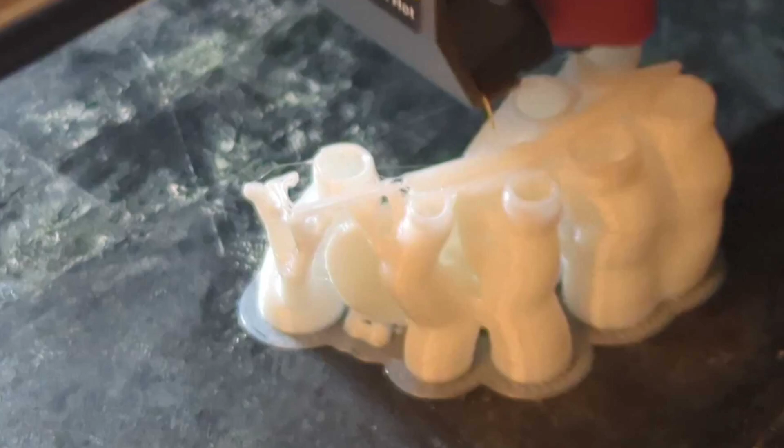So I'm printing this live right now. It's broadcasting live on my channel, this print. I'm watching my own live feed for a second here just to show you that it's printing in action.

So what I'm printing is, I have these hair clippers, and I'm missing the number 1, which was kind of my go-to one. I don't know how I lost it. And a tooth broke off the half, so I decided to go into Solidworks and create my own.

I've already created it, and I recorded it, and I'm just going to speed through the recording and narrate it at super high speed, because it ended up taking me like 2 hours all said and done, measuring and everything. I said nobody's going to watch it for a couple hours, so I'll have it playing at like 70 times speed here, and here's what's going on.

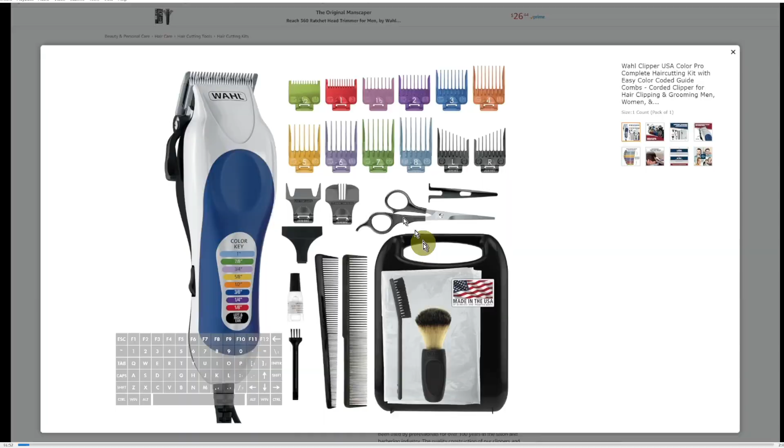Basically I'm going to make a parametric model so I can make any of these sizes. So I started with the number 3, and if I create the number 3, I can then adjust it to size for the regular ones.

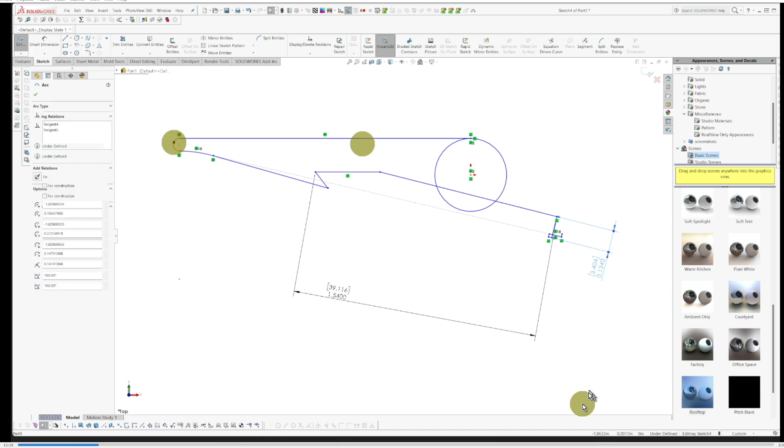This is kind of tricky geometry to measure with these clippers. It's very three-dimensional, not just 2.5D as they say. It wasn't super complicated, but a little tricky, not all 90-degree angles, and not always easy to measure various things.

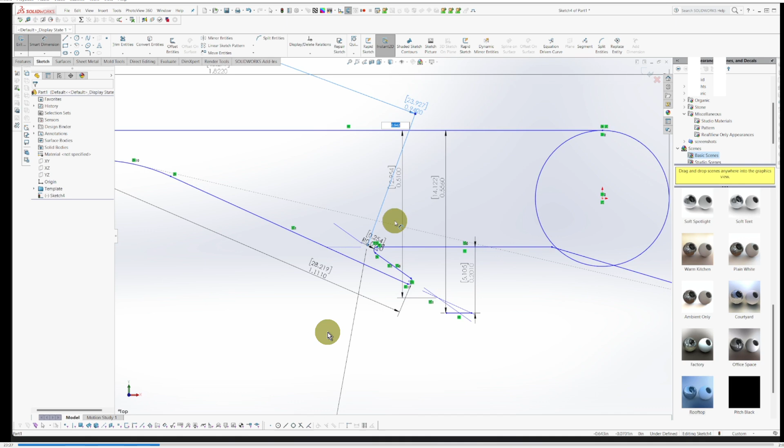So you can see here, I'm measuring and breaking things, but I'm just going from measuring what I can and trying to get the layout as good as I can.

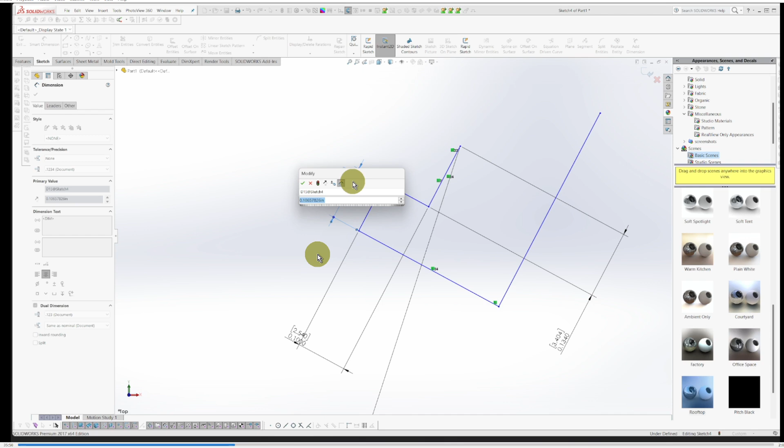Basically my technique here is to make one master sketch of the basic shape, and later I will project the geometries onto later sketches to create individual features.

So as you can see, I'm working through this, trying to get it all fully defined, or at least mostly fully defined. There end up being a couple arcs that aren't quite fully defined, but that's fine. So that was my main sketch.

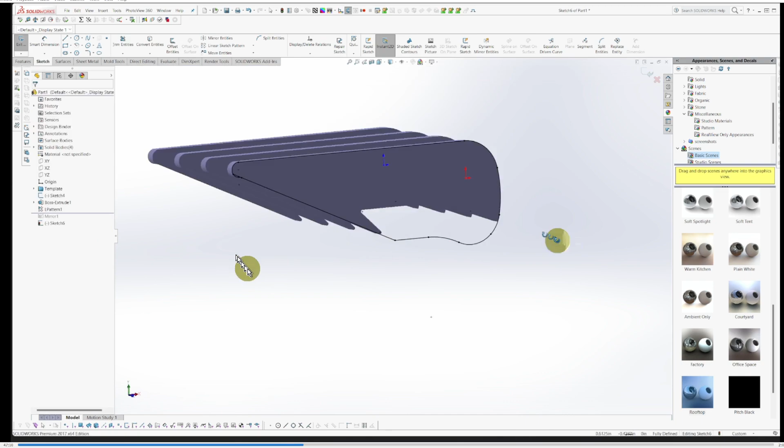Now you can see I started a new sketch based on geometry from that sketch, and I'm projecting geometry, so it goes pretty quick after that. There we go, looking good. It's almost going a little too fast.

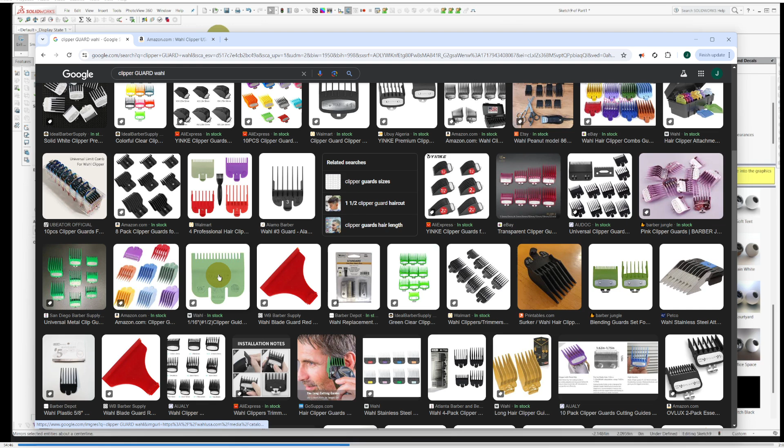This part had to do some thinking here, really trying to mimic the shape of it. Let me go back to the website so you can see. You can kind of see here, it's got these grooves, these slots here, and that allows this to flex relative to these two. You can see it a little bit. There it goes.

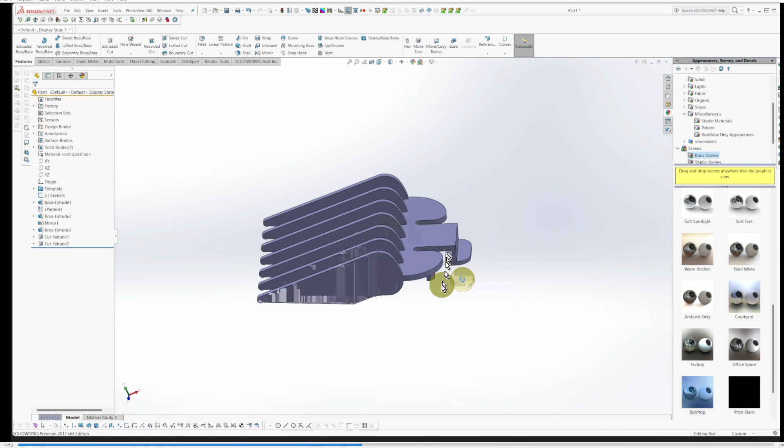So cutting those grooves and getting rid of that. I don't know if you see what, I want to go back a little bit. Trying to go back here to go to here, just to show what I was doing here. So making that flexure piece.

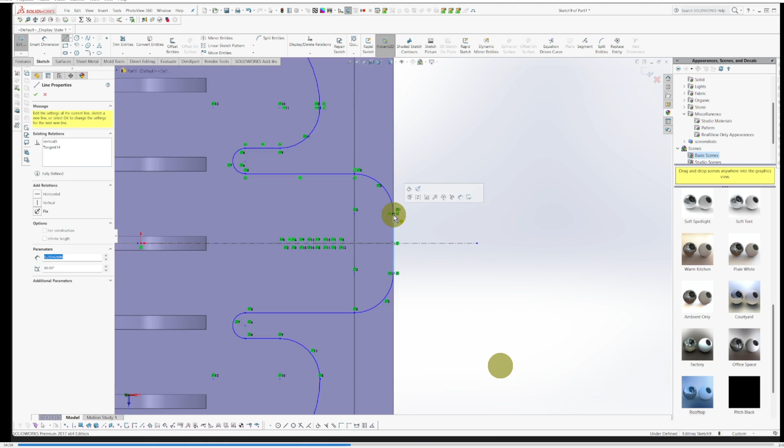You can see this flexes and that snaps over the guard. I started to do it one way, then realized a quicker way to do it, so I got rid of that one, and now I can just change this sketch. The distance between these lines basically tells me how thick that's going to be.

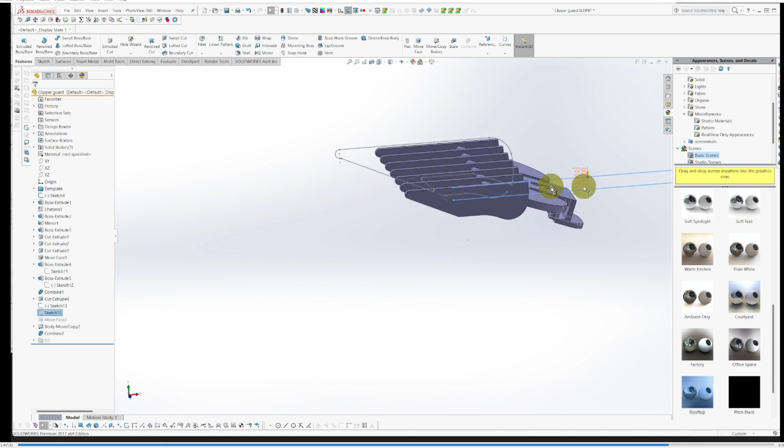Now for this size, which is actually the 0.5, I didn't change the 3 yet, it's actually a little different. So this is showing the 0.1, showing the number 1, and that's probably the number 2. I had to add these little reinforcements on the sides so the sides don't flare out on accident. That was little changes specifically to the number 1.

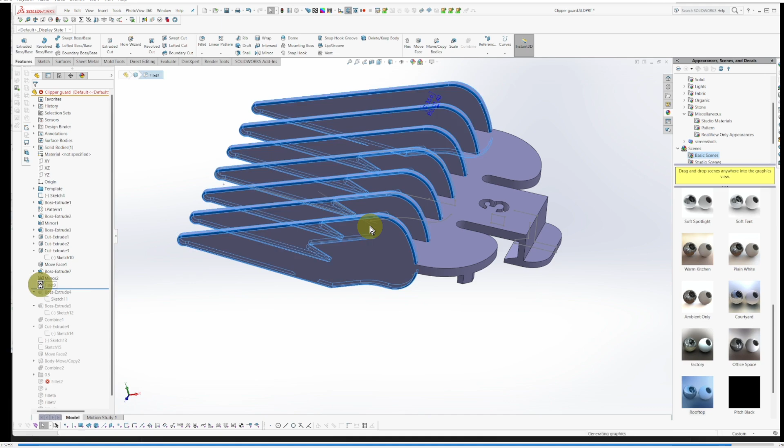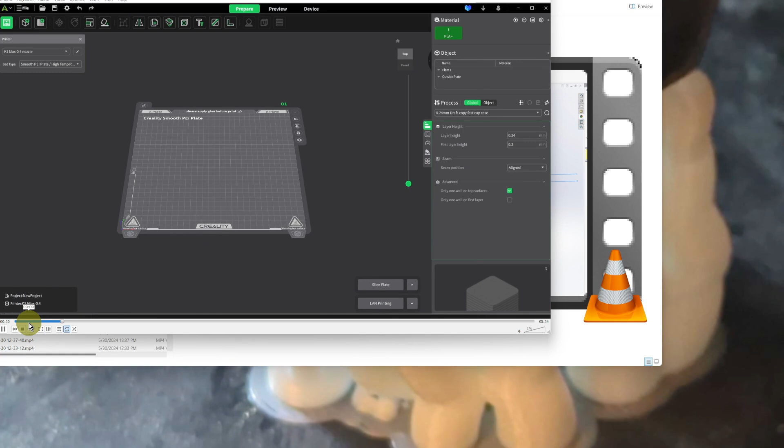It's quite a bit, significantly different than the older version I've been using for like a year now. Hadn't tried to update it, and I see there are significant changes now. It seems kind of nice, and I wonder, like, people use Orca Slicer. I was just looking at that this morning, but I wonder if this catches up to Orca Slicer now.

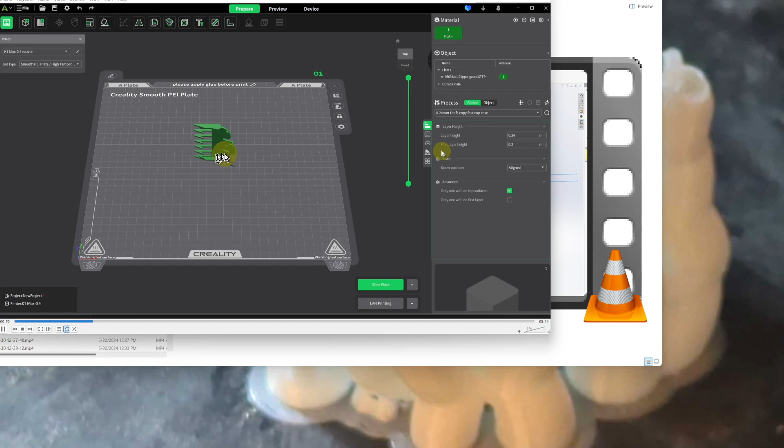I don't know, anyway, so you can see my final number 1 print here. I was debating which way to print it, and I decided to print it flat side down, and then use supports. I decided to use tree supports, figuring that will make a nicer print.

And let's go back to my print. Looks like it's printing successfully. Love this printer. This is the K1 Max, if I didn't make that clear.

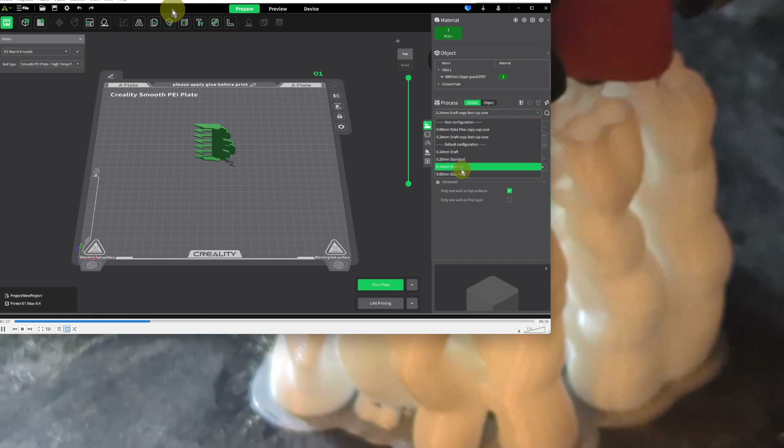Back to my video. I guess I was going pretty slow in here. Oh, you know why? Because I didn't speed this up. I sped up the other one. Yeah, I was going regular speed on this video.

So that is with tree supports, and I just did the 0.24 millimeter draft because I figure that's about 5 layers per tine, which should be plenty. And so it should take about a half hour to print.

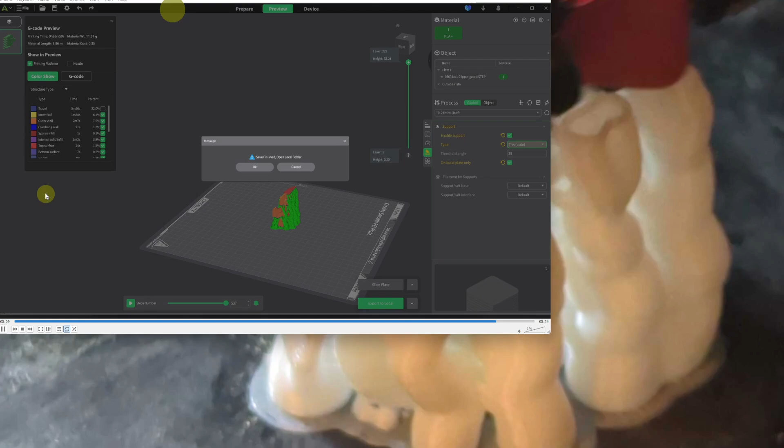And I'm broadcasting the print live, like I said. Now, unfortunately, I've accidentally had it on private for the first 8 minutes, and this is only a half hour print, but no harm done.

This hyper white looks really cool. I don't know, maybe it's more transparent than other whites that I've used. Because a lot of times with white stuff, on the video it just looks all white.

Might help that it's a pretty good camera. It's a Pixel 7 Pro phone, so that might be helping. But I think that white is just very translucent, and so it allows a lot of light to come through, and so you can really see the geometry.

And I guess, you know, if it was just flat geometry of the guard, then it wouldn't be as cool, it wouldn't be as much contrast. But with these tree supports, that really makes it interesting looking, I guess.

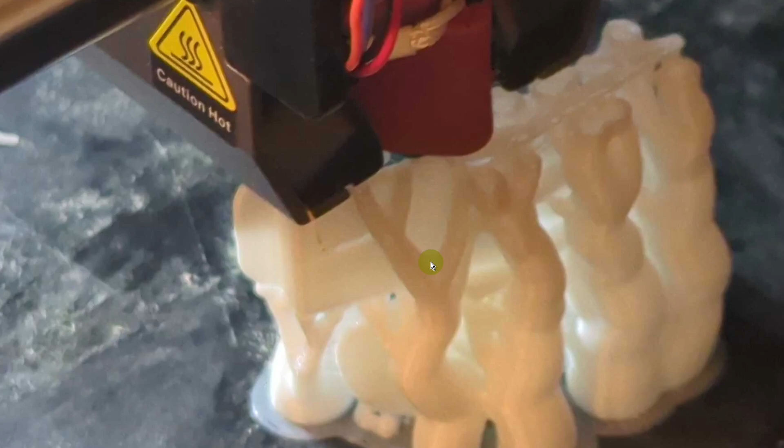One more reason to use tree supports. They just work really well too, though. I wouldn't say I use them everywhere. A lot of times, probably more often, I do use standard supports. But whenever I use the tree supports, I'm very impressed with how well they work.

Looking to see, I mean, we're more than halfway done because I'm at the top edge of the rear snap clip latch. So basically, that's halfway up the print. So we are getting there. It's probably 10 more minutes.

Is there anything else that I wanted to show? I can just go back into my CAD model here, and we'll see if there's anything else to discuss on it.

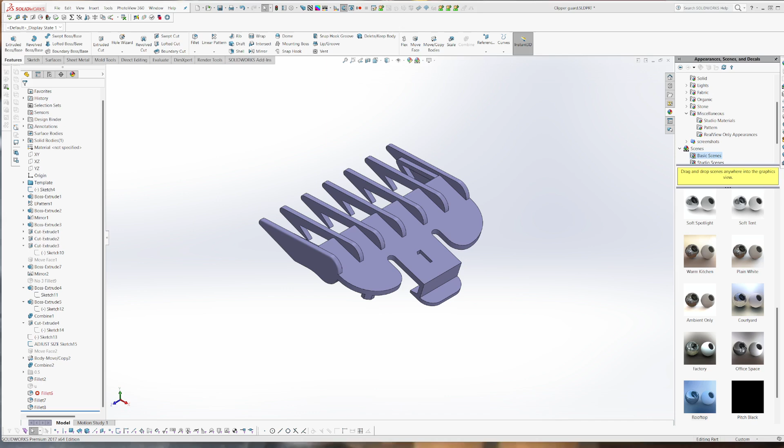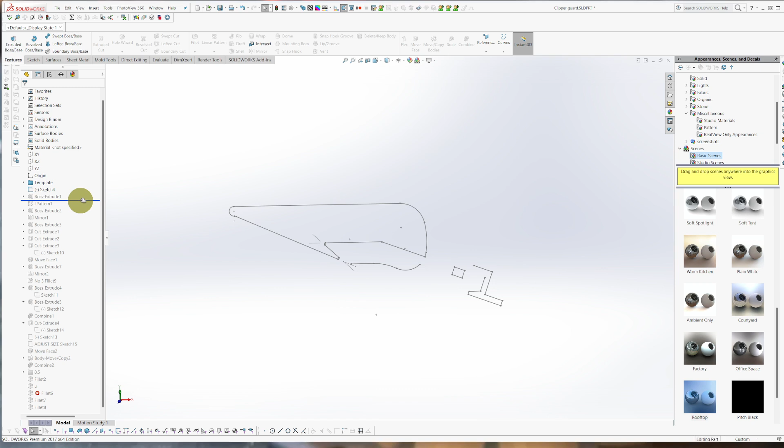So yeah, this is the number 1. And so I guess what I didn't make clear there, let's just do this, let's roll right through it real quick. So first I made this sketch, that's my main driving sketch, and this is based on the number 3, which is 3/8, or what they call it, 10 millimeter, which is pretty close. It's off by like half a millimeter or whatever, just enough to get the basic geometry.

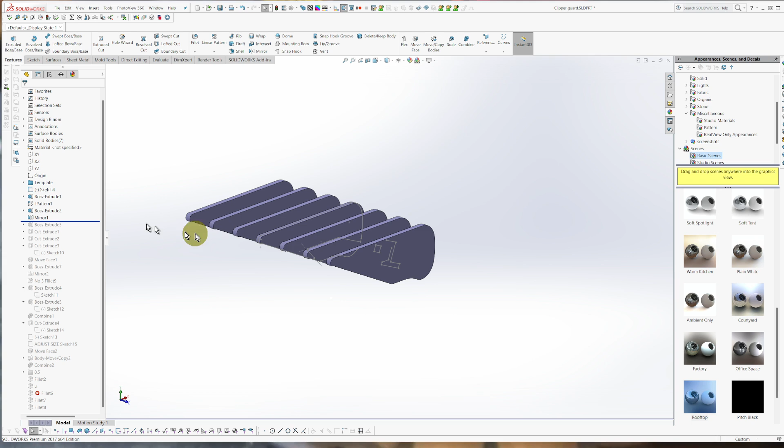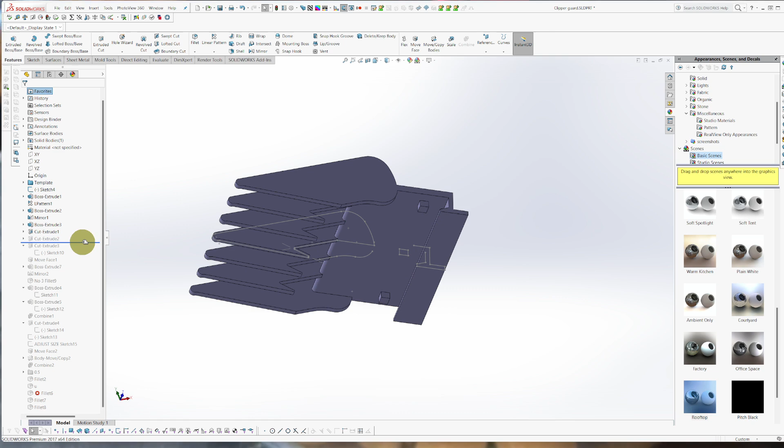And then I patterned that, and then I modified this outside face because the outside face retains it side to side, the outside 2 faces. And so then I mirrored all that, and then I extruded the snap the full length, and then the nubs the full length, and then I think I cut away the nubs here. Yep, and those just rest on the metal clipper, platen, or whatever it's called. And then here I cut that out, so now you're really starting to see that's basically the whole geometry done.

Then I had the number cut out. I don't know if you know how to, it's pretty easy to do in Solidworks sketches. I tell you what though, Rhino can do all kinds of cool things as far as like bending text around 3D surfaces and things. Like I was looking for my sous vide.

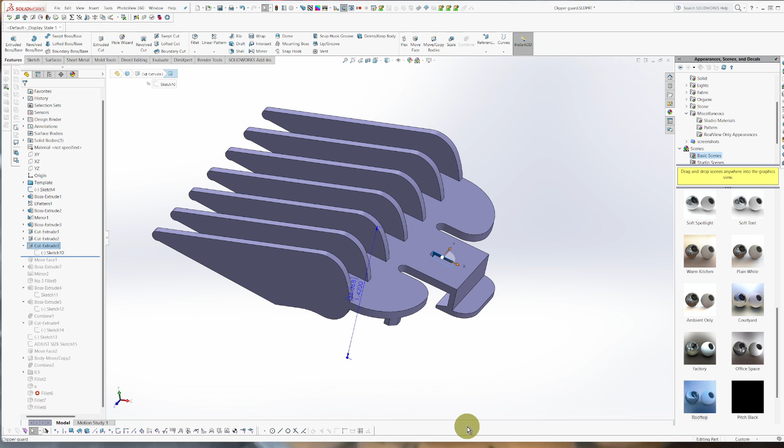Subvid. No, subvid movie.

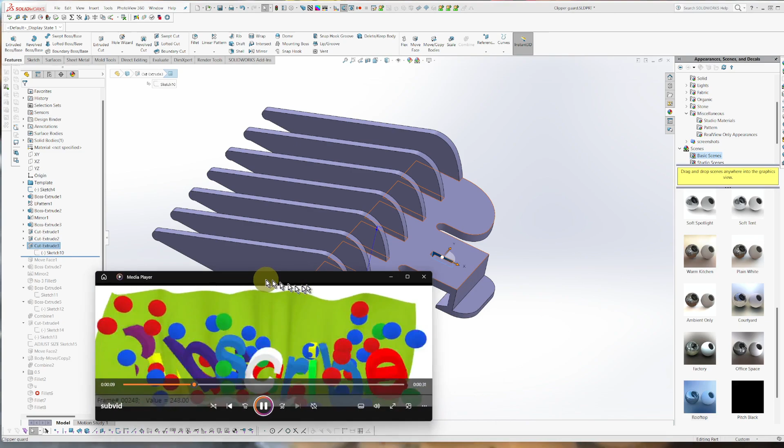So like this thing, I made this in Rhino, and it didn't even really take me that long. And I'm not even an expert at Rhino, just kind of, I mean, I know it's more of a grasshopper thing than Rhino.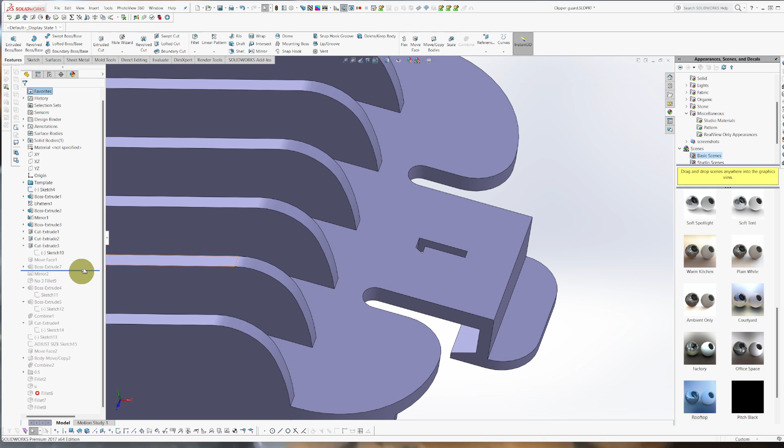And so let's see what else on here. So then what am I moving face on? Oh, that was, I made the 3 bold on there, but I did away with that. And then this guy is what? Oh, I put these reinforcements on the side, so these sides will resist flaring out. Just mimicking the design I'm holding in my hand from Wahl.

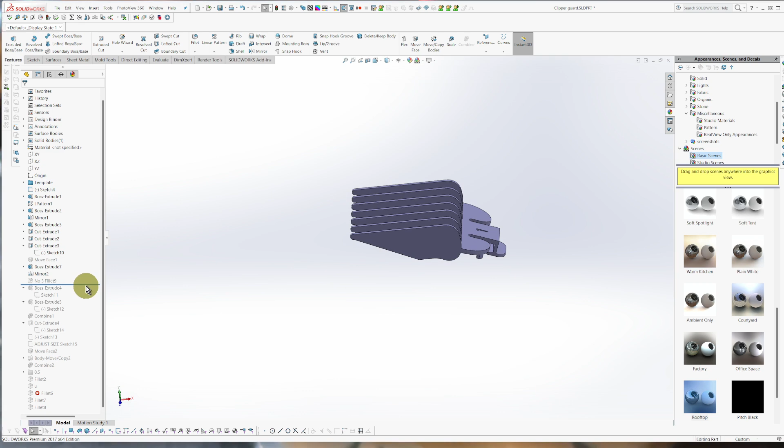And let's see, just filleted there, but it's suppressed for whatever reason. Oh, that was for that specific size.

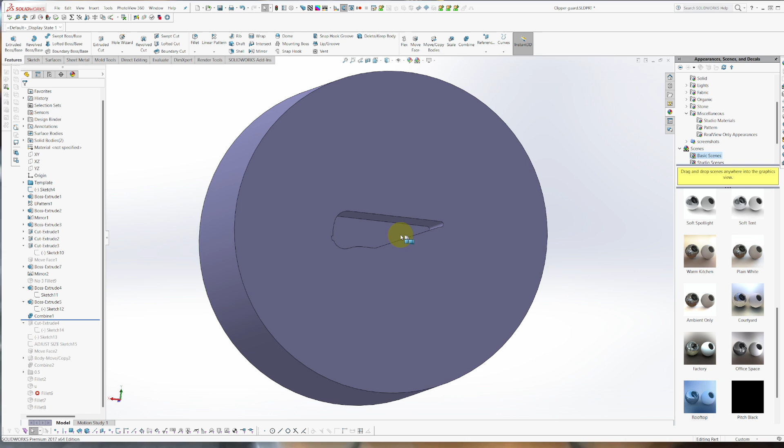So here, what I decided to do is create this big round boss and then cut this part out of it, which is the perimeter. So I'm going to combine right here, so now I have this big round boss, but with this shape cut out of it.

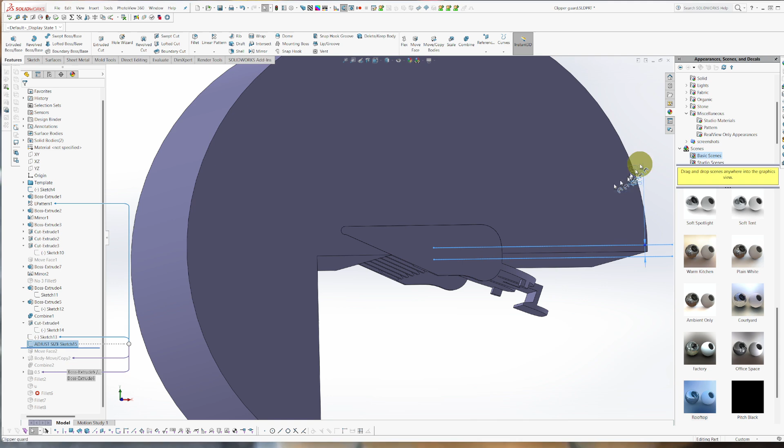And then I'm going to trim the bottom off. So what this allows me to do is basically realign this to where I want to cut it off. So if I adjust the size, I have this sketch here called adjust size, and that gives me this number. This bottom line is basically at the blade of the clippers.

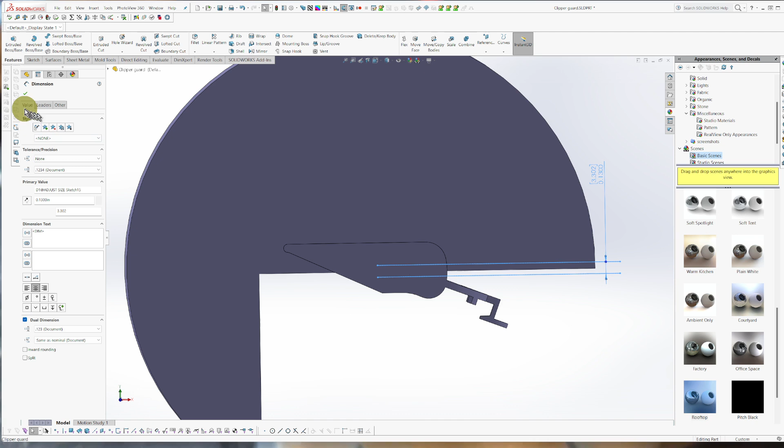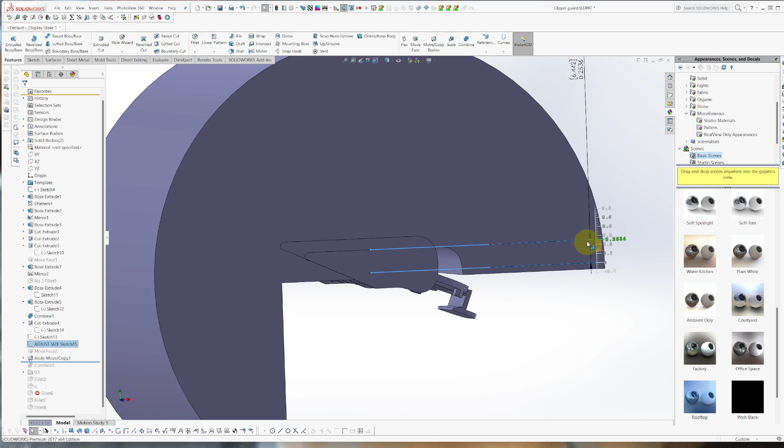So whatever number I put here, this is 1/8 of an inch, 0.125, so 0.13, close enough. Wherever I put this line, this next feature moved it to that line. See what happened there? So that's there, and then I move it to here, and it's there. And if I move this up, it'll follow it. So if I combine these, now it's trimmed back down. And I also added this fillet here.

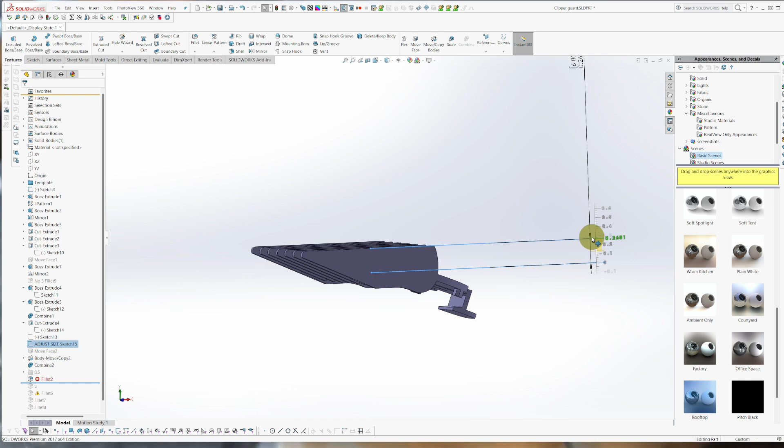So now I can adjust this size to whatever dimension clippers I want, up to the 3/8. I don't need one bigger than that, I already have them anyway. I could definitely adjust this and make them as tall as I want, and it'd be very easy to do. I'll probably do that because I'm probably going to put it up for download. Might help somebody, might make me $1 or $3.

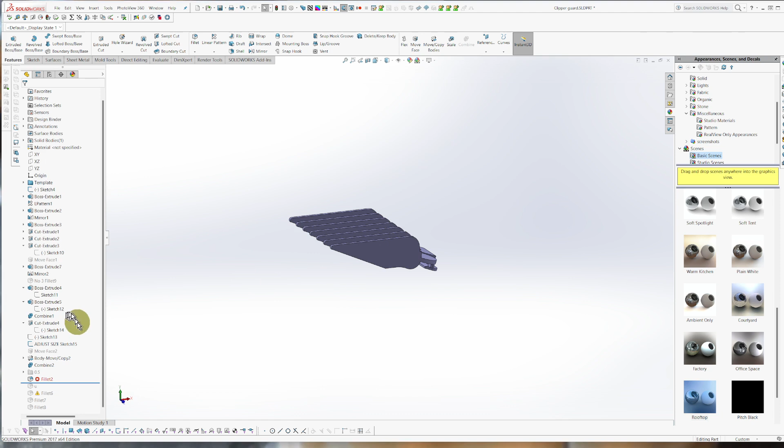Let's see how the print's coming along. It's getting there, it's actually pretty close to done.

What else? I didn't do super high speed, just did the draft quality. This is Hyper PLA though, so I could have done a little faster. I was printing the other day at like 511, so this is probably like 300 millimeters per second. I had upped it to like 511. I could have gone faster, haven't tested how fast I can go yet.

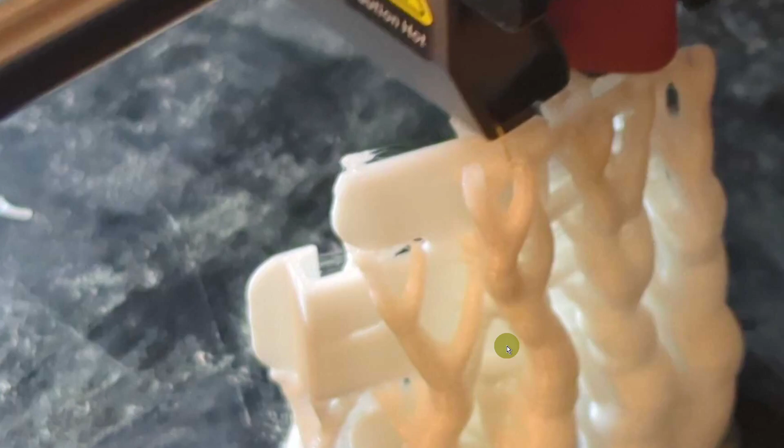And that was also on the exterior walls, the perimeter walls and everything, except for the first layer. So it was actually really fast and printed fine. Very fast printer, very satisfying printer to use, nice build volume. What else do we have going on in here?

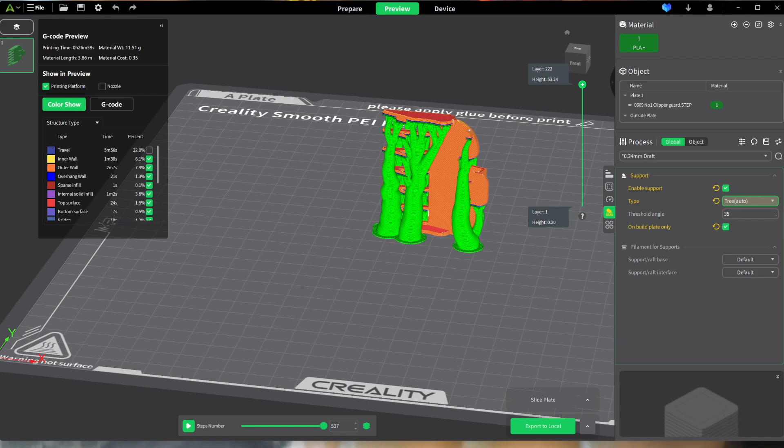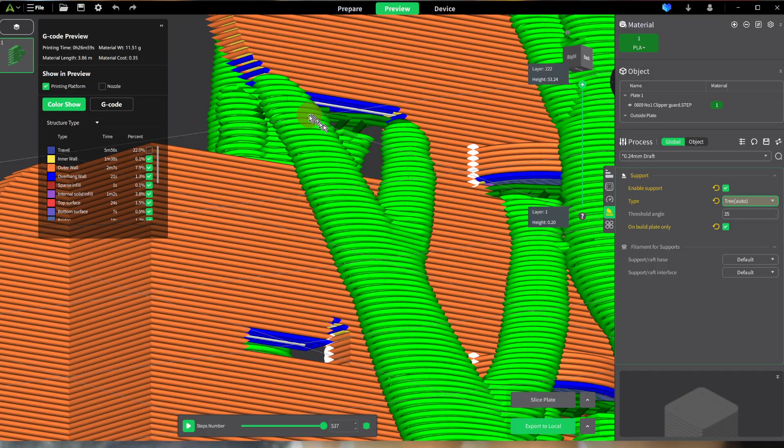Let me go into the slicer a little bit. So they added on the slicer, here you go, you can see my tree supports here. I thought it was going to put it in the one there, but it didn't. It's interesting how the tree supports put... oh, what am I doing wrong? Oh, there we go. So it makes the trunk sort of, and then it makes these little, just a bit of a squiggle there, just enough to rest those on, and it seems to work really well.

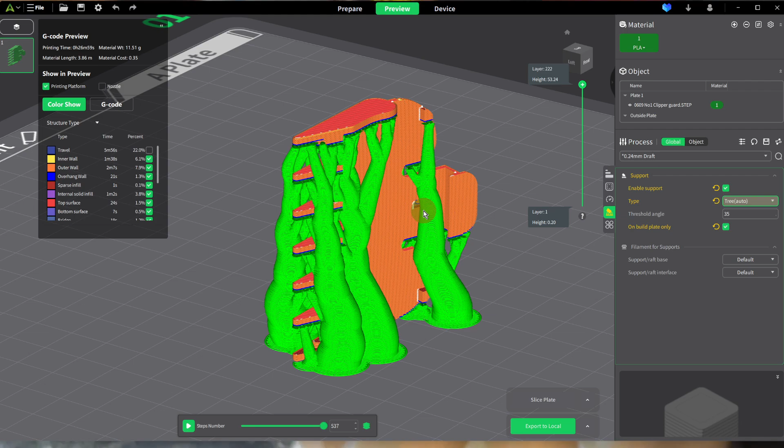So I'm basically going to print this one size, which is the one that I'm missing. We'll see how that fits and see how it works. And if that works, then I'll probably print off the half size too, and also save more sizes to STL files so that people can download them.

Interestingly, if I upload to Cults3D, it forces me to upload at least one STL file. Step files, it'll take step files too, because this slicer will slice step files. And the reason I like that, see this nice smooth curve? If I made this an STL file, this would be like faceted, like a low poly type of thing. Now I can make it higher poly with this, saving the STL, very high quality.

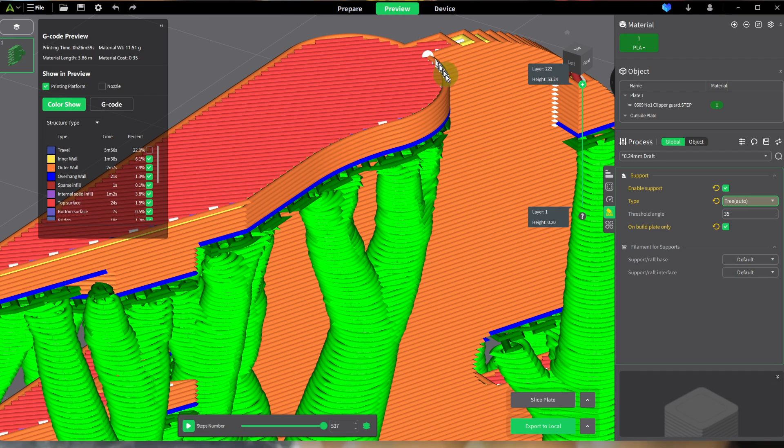But it's still mesh, so there's still a little bit of jaggedness to it. It's almost like anti-aliasing versus not anti-aliasing, so using the step file versus using the STL file. I do like to use the step files. It's funny though, when I send client files, they're like, I can't open this STL file, I can't open this step file. I'm like, sorry.

Actually, it's because this particular client has a Mac, and I guess the Creality print slicer for Mac, because he bought the same printer, doesn't allow you to use step files, or it didn't then. Anyway, maybe this new one does. I'll have to ask him. But so there we have it. I don't know if we have anything else to mention here.

So I see the multi-material support now in this slicer. Like if I had a multi-material setup, I could make the supports a different material or whatever, and I am in the market for a multi-material printer.

I actually tried to get the K2 Plus the other day during the first 50% off, but the website was broken and said it can't ship to my address. Somebody commented that this printer isn't in the warehouse in my area yet, which doesn't make sense because they're not printing until September anyway. So they're not in anybody's warehouses—they need to produce them first. But whatever, this is just about done here.

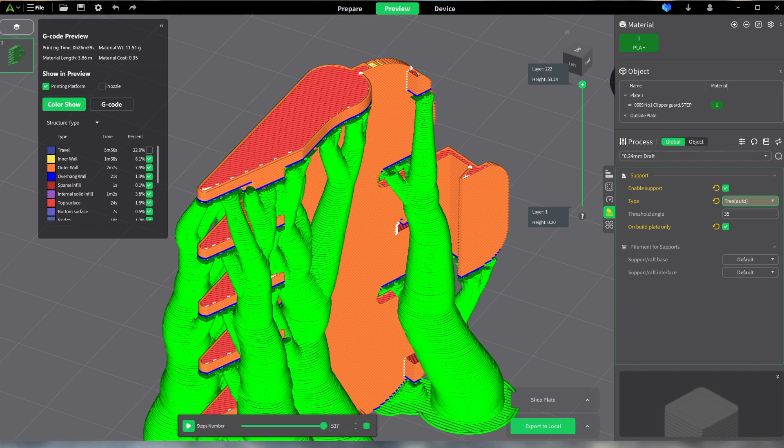I'll add on to this video, I guess, actually putting the guard on the clippers and see how it works. So stay tuned, and we'll see how that goes.

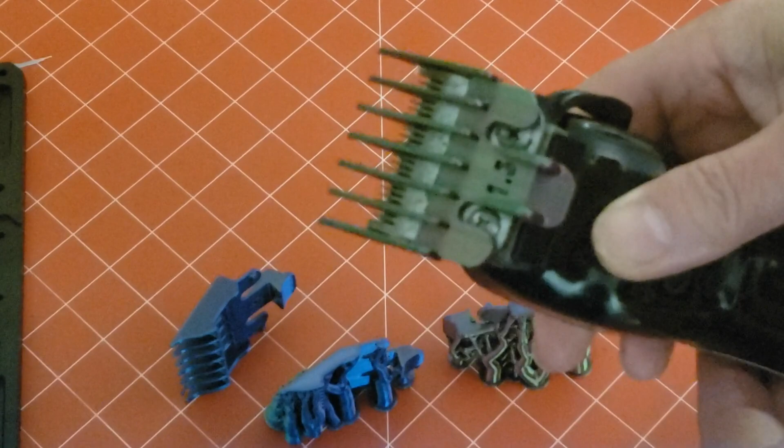All right, so here's my clippers, and this is with the number 1.5 that I already printed and cleaned. This is quite a bit different—I added some reinforcement, quite a bit different than what was shown earlier in the video.

I made some changes. I added these two ribs here because with it being 3D printed, not solid, and being PLA, it would get stressed and lose its capability to clip. I also made this much thicker and longer, and also sort of dished so it's easier to get my finger under there to pop it off.

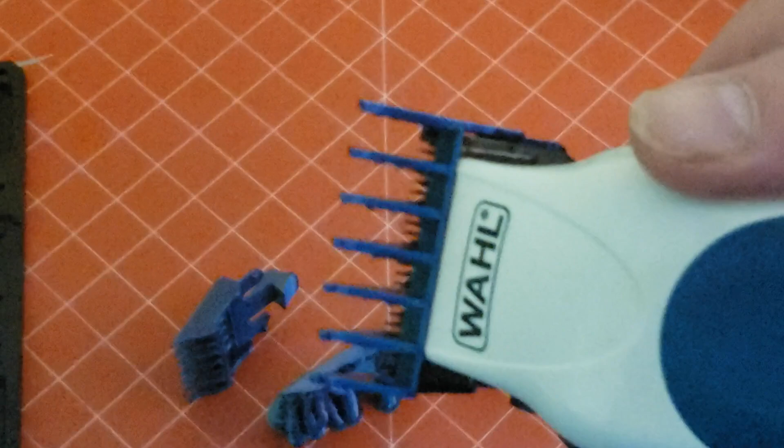I also included this bar across all of them just to give the tines some extra support, and you can see here that it doesn't impinge on the cutting. So it just gives it some extra strength to hold it together, especially because it's PLA.

And the reason I'm using PLA and not a stronger material is because the supports pop off of PLA so much better. So I ended up making 4 sizes, and I could make more, but for now I put these 4 sizes up for download. I'll show you how.

So that was the 1.5. Here's the 2, which is 1/4 inch. The 1.5 is 3/16, 190 thousandths. I could clean this up a little bit better, but it's pretty good. This tine went a little goofy—not sure what happened there exactly. I figured I would chop that off at some point, but I also don't want it to be uncomfortable.

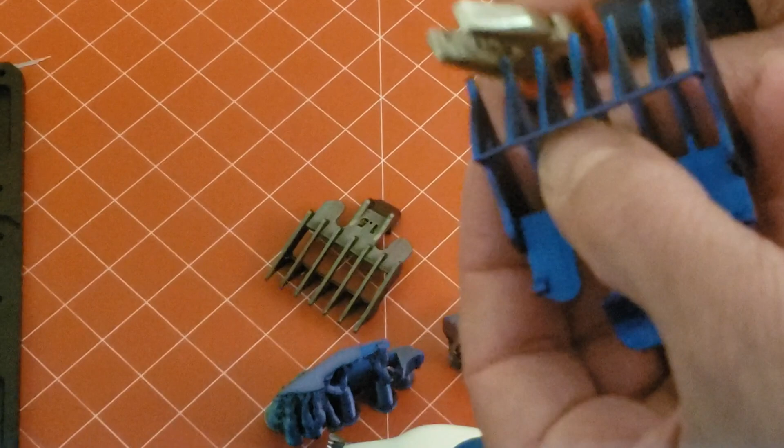I'm going to cut that off when I have the proper tool in front of me, which I don't see—I don't know if you call those nippers. And I could potentially clean out between these tines. This is a burnishing tool, so the edge is kind of curled up here. You can't see it at all, it's almost microscopic, but it's basically for scraping things a little bit, to allow you to take off any excess material in there.

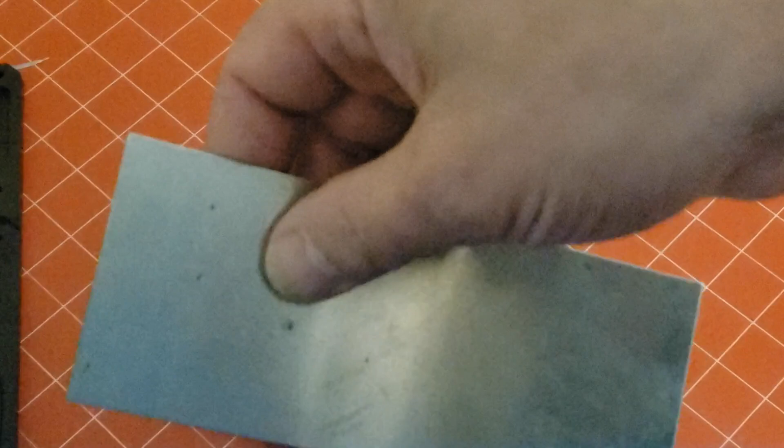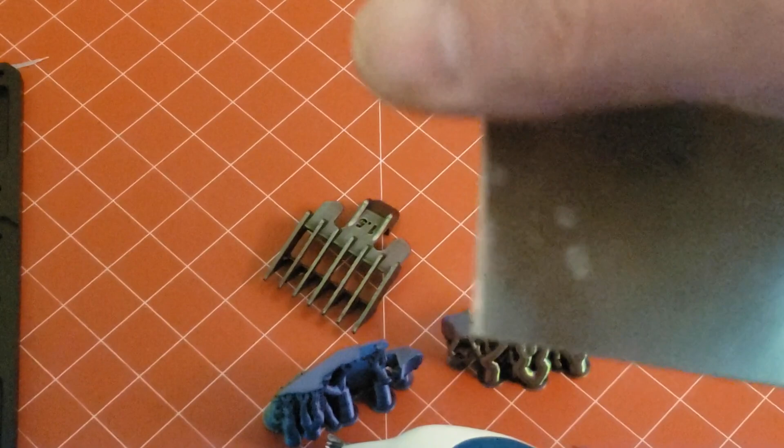I bought these off Amazon. If you look up burnisher kit, you can feel it—can you hear that? So this one's rounded off, and this one's curled up, burnished to curl toward the camera. Can you hear the difference? I'll do it by the microphone. That's the non-burnished side. That's the burnished side.

Anyway, it came like a set of 4, pretty cheap. Got those a while ago. But anyway, so let's see. This is the half size, which is 1/16 of an inch. So let's clear it.

Get these supports off. I like to start at the fat end of each tree support—I find it'll pop off much quicker that way, rather than breaking off the small parts. As you can see, that came off pretty easily. That came off quite easily. Because I have this bar here, I'm not breaking the tines. That's one problem I had with the original design, especially on the small size one—I was breaking the tines because they were just cantilevered out and not supported. So at least now they're sort of cantilevered out from 2 positions. I see I have a tiny little bit of stuff inside here.

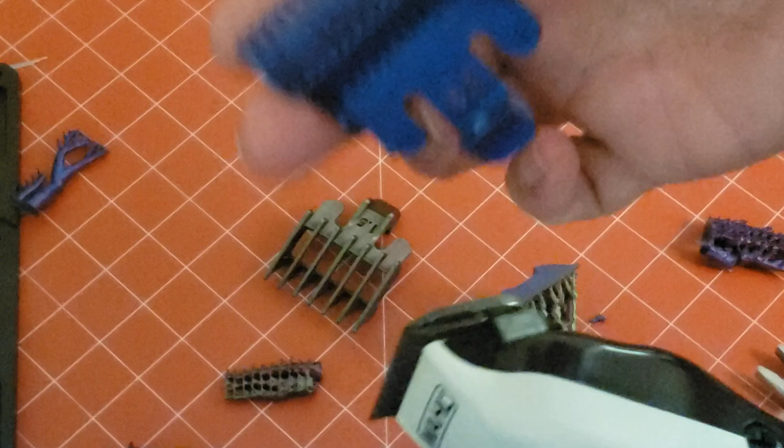Let's get this guy. I made quick work of that. So there's that guy—the 0.5, which is, like I say, 60 thousandths, or 1.5 millimeters, or 1/16 of an inch. Clips on there nicely. Nice shallow cutting. I can still use this adjuster—not even sure what this adjuster is really for.

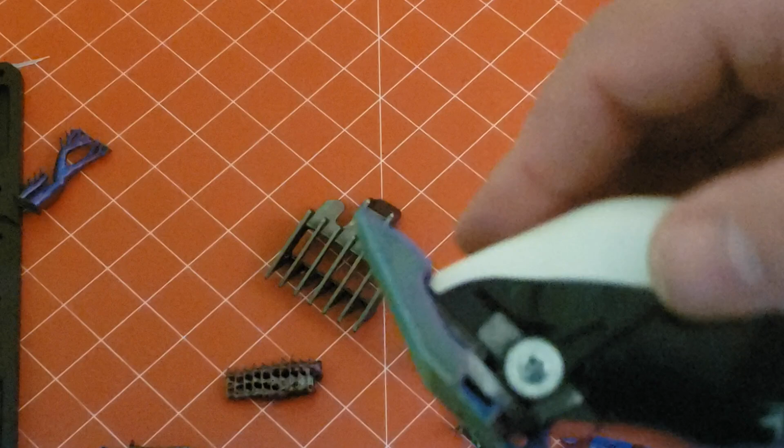I mean, I kind of get it, but I don't pay much attention to it when I use it—just make sure it stays in the same position. But so there's that one, and then I just have the other one to clean off. This is, what's left—is this the 2? Or no, this is the 1, the 1/8 inch.

So again, just start at the big end. As you can see, with the tree supports, it comes off super easy. Actually, I prefer regular needle nose pliers, and I have multiple pairs in various locations—I have sort of my general tub here of various pliers and things I carry around. And for some reason I don't see regular needle nose pliers. What's here? I have mini mini needle nose pliers. These are nice, they have a little spring in there. Even though they're pretty junky, well used, they feel very greasy—I feel like I need to wash my hands already, just from holding this for a second. Who knows what I got on here?

Break those guys off, start at the fat end. That didn't cooperate. Now you got to be careful with this ridge to not break it off. I mean, it's not just going to fall off, you just be careful not to grab it and yank it off with the pliers. This one, for some reason, not popping off—it's monolithically... is that the word I'm looking for? You know, maybe it's because of these mini needle nose pliers. The other pliers brings them off in big pieces.

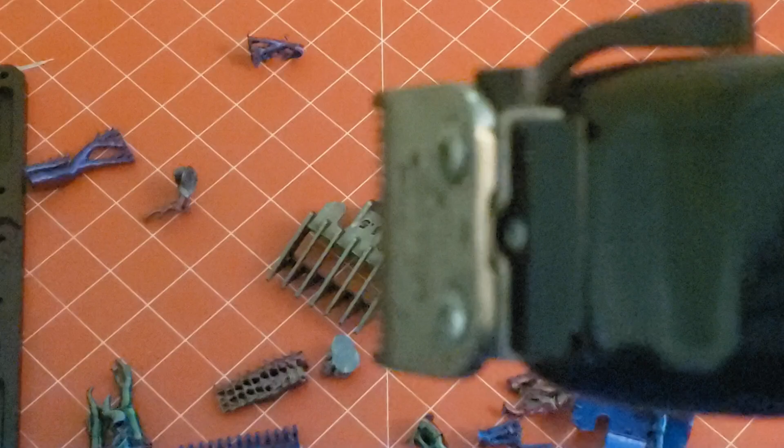And this one, I imagine, will pop right on like all the rest did. Snaps right on, the clip doesn't break—the latch here. And another thing I had to do: I made this part narrower. Initially I had it full width, and then I realized there's sort of a divot there, so it wasn't actually tucking in—it was gripping on, but wasn't actually tucking under. So that feature allows it to really tuck under. So anyway, there we have it.

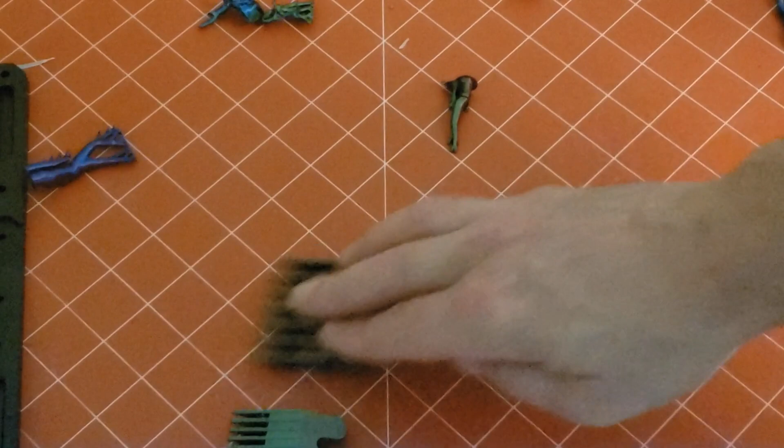We have our clipper set. We got the half, we got the 1.5, the 1, half, 1—yeah. We get the half, the 1, the 1.5, and the 2. If I put them up like this, you should be able to see the progression of the thickness: half, 1, 1.5, 2.